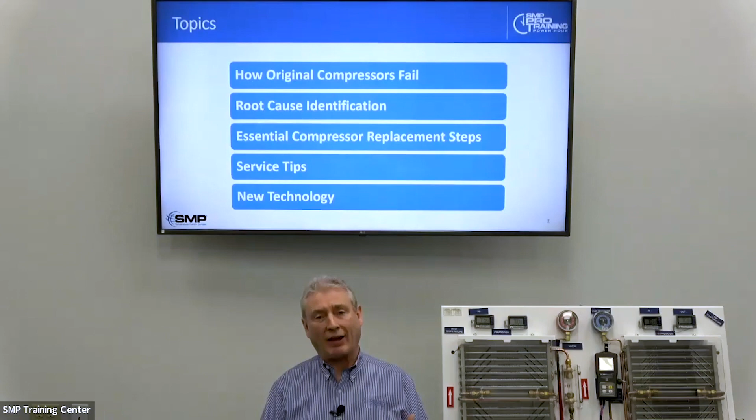Just FYI, I'm sure you know this already, but if you work on air conditioning for profit, or even to buy refrigerant in containers larger than 2 pounds, you need to be Section 609 certified. If you want to get certified, the fee currently is about... go to macsmobileairclimate.org, there's a Section 609 tab, and you can take it from there to get certified. If you work on cars and light trucks, you need to be Section 609 certified.

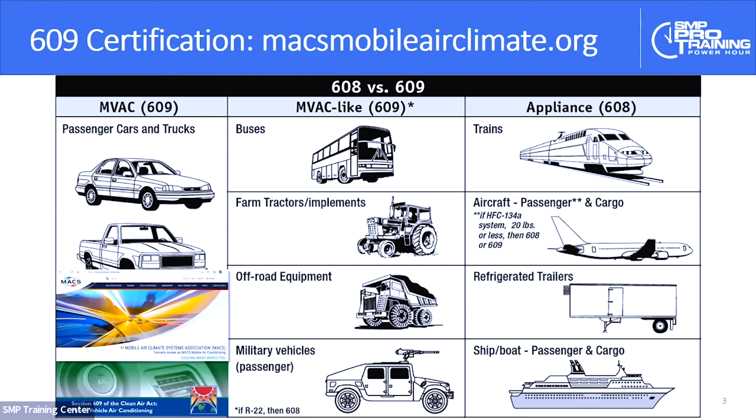If you work on planes, trains, and some of the types of equipment in the right column there, there's another certification called Section 608. That's what you would need to be certified on for those.

Not going to get too deep in the weeds here, but it is important to understand some air conditioning basic principles. If I take a tank of R134A on the left, or R1234YF on the right, and I cool that tank to 34 degrees, the static pressure in the tank of 134A would be about 29.5 psi, whereas in a tank of R1234YF, the pressure would be about 32.9, about 33 psi.

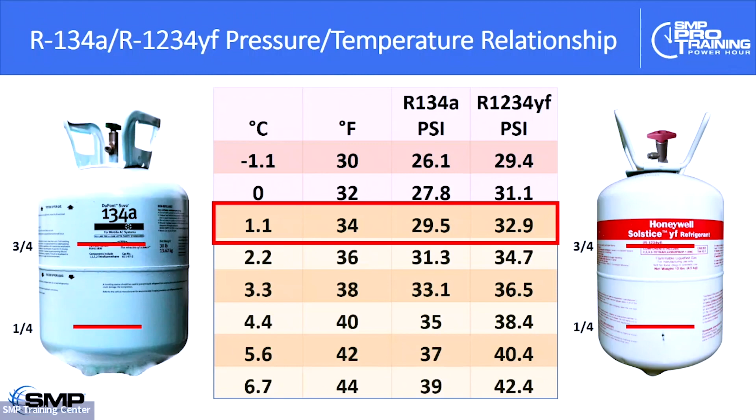The point I'm making is if I were to draw refrigerant off the top of either of those tanks, the pressure is going to drop, and the refrigerant is going to evaporate. The refrigerant will start evaporating until it reaches what we call the saturated pressure temperature - at 34 degrees, it gets back to 29.5 psi.

If I start the compressor and start drawing refrigerant out of the evaporator, reducing that pressure to somewhere between 25 and 45 psi on average, any liquid refrigerant in the evaporator will start to boil or evaporate.

Now the compressor is going to pump it into the condenser, forcing it up against the restriction of the expansion device - the TXV or the orifice tube. That's going to raise the pressure and temperature. And if I turn the fan on and blow air across the condenser, it's going to condense back to a liquid.

That liquid will be forced up against the orifice tube or the TXV. Then the compressor, either using the TXV or sizing the compressor, controls the pressure on the liquid in the evaporator so that it keeps boiling somewhere between 35 and 40 degrees, something in that range.

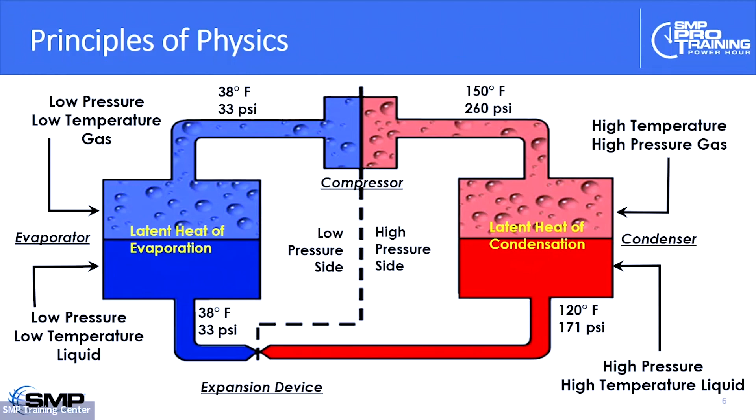If I add a little temperature to the refrigerant, the liquid is going to start getting warmer. But if I've got it in that pressure range, 25 to 45, inside the evaporator, you can see that as I add energy, that phase change is when the refrigerant is actually evaporating. As I add energy here, there is no increase in temperature - as the refrigerant is boiling or changing state or evaporating, there's no increase in temperature of the refrigerant inside the evaporator.

And ideally, this is a normally charged evaporator, orifice tube type system. You can see the refrigerant is going in at 35 on the bottom.

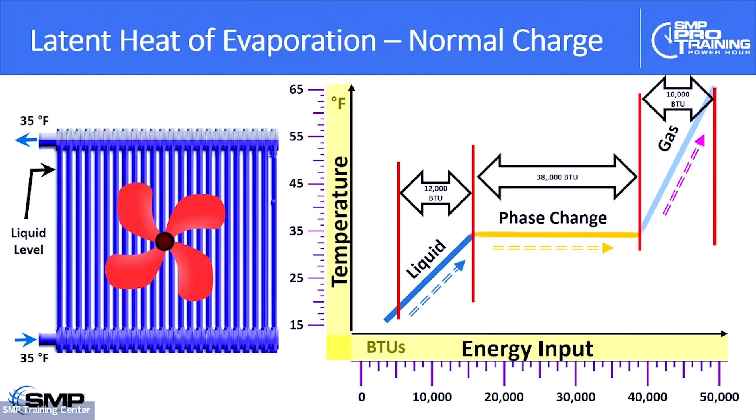It's coming out at 35, the same temperature on the top. If this evaporator was made of glass, I could see through it, and you'd see the refrigerant burbling, gurgling, boiling inside, mostly gaseous coming out the top. On an orifice tube system, there will be a little bit of liquid to carry oil up and out. The key thing to understand from the graph is that a greater amount of heat energy is absorbed as the refrigerant changes state from liquid to gas, but there's no increase in temperature. That's what you want inside the evaporator: a constant boiling state with the evaporator almost full of liquid.

Now look what happens as the vehicle ages and the customer hasn't serviced it. The liquid level in the evaporator, shown in blue, is much lower now, so all the liquid boils away much more quickly. The period of phase change is shorter, and much less energy is being absorbed during that phase change. In other words, as the refrigerant is evaporating, because there's much less liquid, there's not nearly as much heat energy being absorbed.

The key thing you may notice is that the refrigerant is still going in at about 35 degrees, but the pure gaseous refrigerant coming out the top is actually up around 50 degrees. That's important, because I've got a 15-degree increase across the evaporator. That temperature difference is a giveaway clue that all the liquid refrigerant has boiled away, and all that's coming out the top is pure gaseous refrigerant.

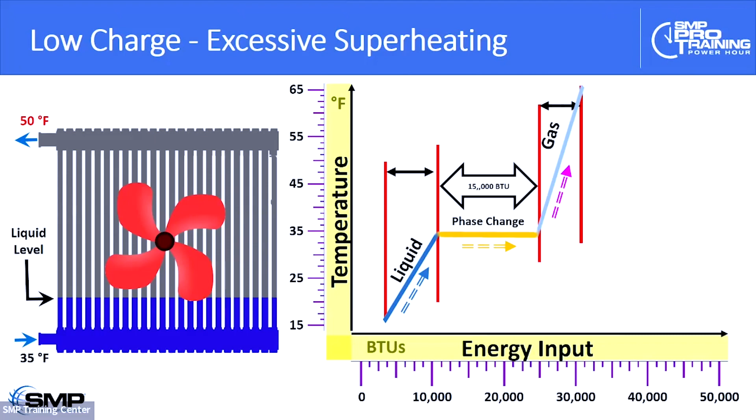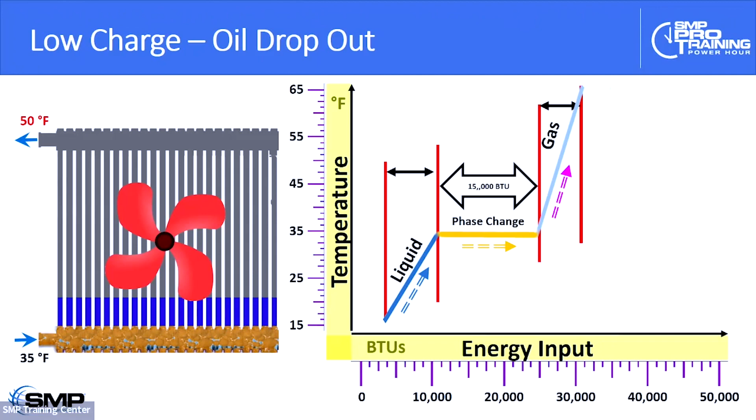This is important because oil remains more or less in the liquid state throughout the refrigerant circuit. As the liquid refrigerant boils away, the oil starts to drop out and is left behind in the evaporator. Over time, as the compressor wears and ages, all the lubricating film gets stripped off the evaporator, off the compressor pistons and cylinder walls, and then you get metal on metal. Over a long period, fine microscopic abrasive particulates can slough off the pistons and cylinder walls, and that debris gets carried throughout the system.

It's fine, microscopic debris that will fit through most of the filters and screens throughout the system, and it will be concentrated because of the oil that's been pooling in the bottom of the evaporator. That abrasive soup will be concentrated in the bottom of the evaporator. You can appreciate that this is the typical failure profile of how most original compressors fail. Typically, when the original compressor fails, you'll have a dirty abrasive soup of oil and abrasive debris in the bottom of the evaporator, and you can understand why it would be important to get that out of there.

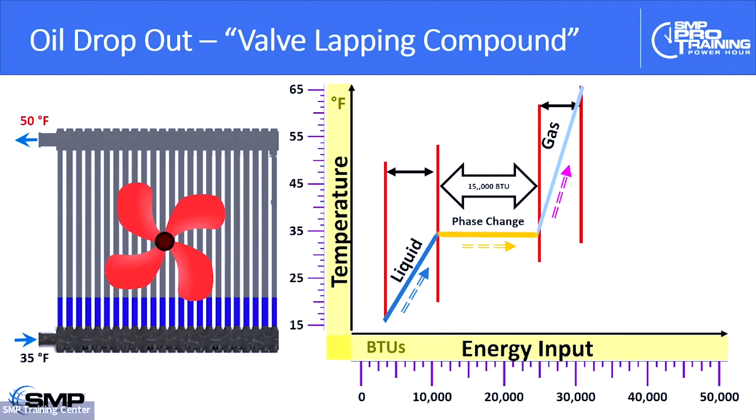Compounding the issue, if we look back to the original R12 systems with mineral oil, the molecules of oil and refrigerant had an attraction for each other. So even when the evaporator was low on liquid refrigerant, as it evaporated, because the molecules were attached to each other, the evaporating refrigerant carried oil with it up and out of the evaporator. This maintained compressor lubrication even with a low charge on an R12 system.

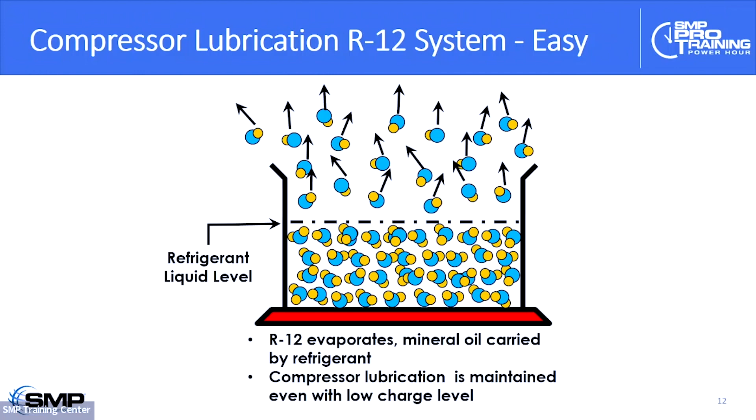However, on an R134A system, maintaining lubrication is much more difficult. That's because as the liquid level drops in the evaporator and the refrigerant evaporates, there's not nearly the same molecular attraction between the refrigerant molecule and the PAG oil molecule, so the oil gets left behind.

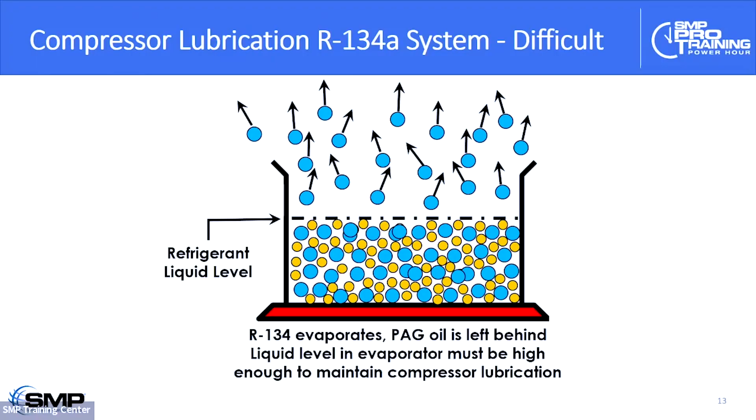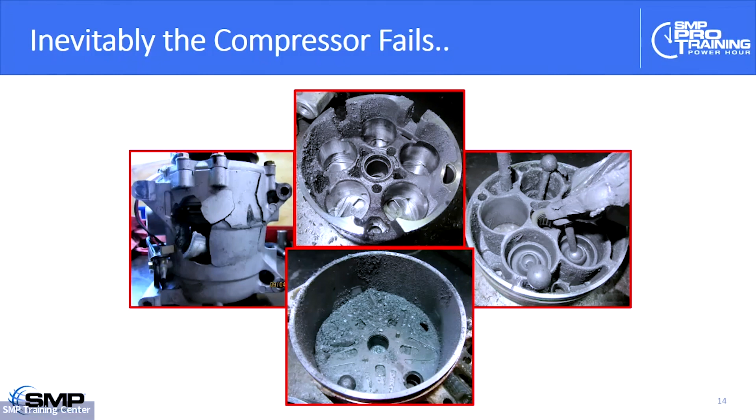And of course, inevitably, the compressor fails. This is the end result. I would say this accounts for 80% of original compressor failures. This narrative, this sequence of events, is what typically results in the original compressor failing.

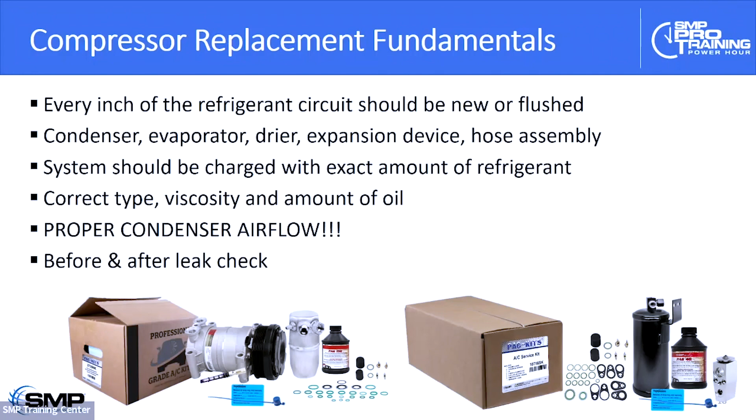The system should be charged with the exact amount of refrigerant - we'll come back to that later - the correct type, amount, and viscosity of oil, and proper condenser airflow. I'm emphasizing that because you'll be amazed at the number of air conditioning performance problems that can be traced back to a condenser airflow issue. And of course, keeping in mind that low charge means lack of lubrication, it's important that we do a thorough leak check, ideally before we do the repair, and then again after it, before we turn it back to the customer.

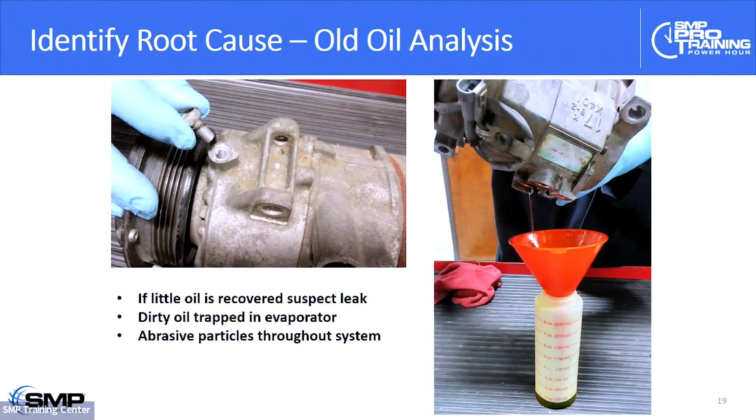So let's talk here - I've got a demonstration set up. Let's talk about how we're going to identify the root cause of the compressor failure. So I have here a compressor, and it's off of an older truck. The first thing I'm going to want to do is an old oil analysis.

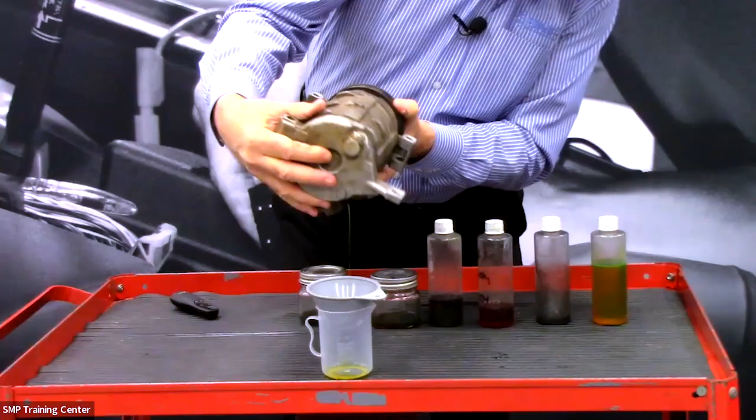I want to figure out, using the old oil, a lot about what actually caused this compressor to fail. So the first thing I'm going to do is try to drain the oil from the old compressor - there's a little bit coming out here. So you can see that I'm getting very little oil out of this compressor. And why that's important is this.

Let's suppose it was a 7 or 8 ounce system - it held 8 ounces of oil, and I only get a half ounce out of the compressor. Right there, I know that there's 6, 7 ounces of dirty oil still somewhere in the system, and that dirty oil is almost certainly in the evaporator - that valve lapping compound, if you want to call it, that's going to be dropped out on the bottom of the evaporator.

The other thing, of course, is I'm going to look at the condition of the oil. Here, for example, this was a repeat - this was actually a warranty return compressor. It turns out when we did an analysis, half this oil here is actually full of solvent - the flush solvent - the system wasn't properly flushed.

Here you can see, and if you want to get a good sense of this yourself back in the shop, take the oil bottle off the side of your recovery machine if it hasn't been drained in a while, and look at the bottom of the bottle. You'll see there's a film of microscopic abrasive particulates settled out on the bottom of the oil, and that's what's in the bottom of the evaporator. That's why it's so important to flush the system.

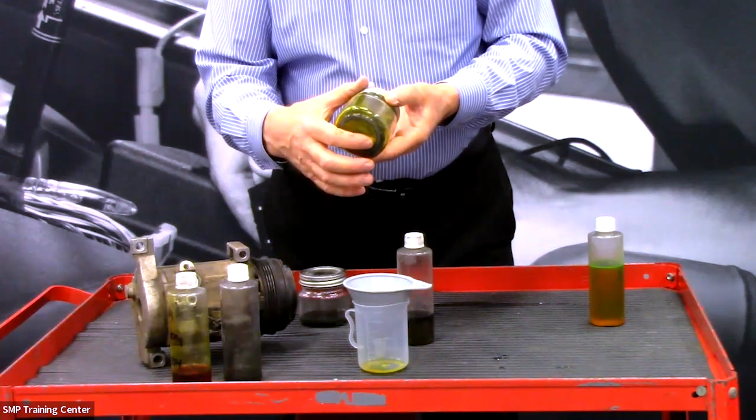Here's another couple of examples. If I look at the bottom of the glass, you can see that microscopic debris has settled out - the microscopic abrasive particulates that have settled out of the oil in the bottom of this jar here from a failed compressor.

So the other thing we want to do - let's move this display to one side here - and we're going to look at what are some of the things we need to do. What do I need to do to properly handle this? I've got a failed compressor - it's come in with the failed compressor, it's either seized or it's knocking, or I know I need to replace it for some reason or other.

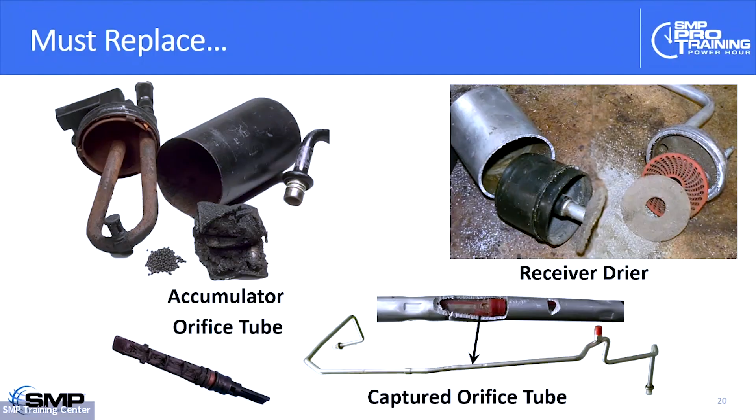So let us see what we need to do for a successful repair here. The first thing we insist on is that you replace the accumulator.

If you look inside an accumulator here, we've got one cut away. You can see it's got the desiccant material in here. If flush solvent were to contact this, the desiccant medium actually gets hot with some solvents, and it will expand. It just turns into a mess, basically. Also, when you look inside an accumulator, it's got kind of a snorkel tube coming to the top here. We call this the U-tube. You can see that if I get solvent in here, I could never get it out. You're just never going to be able to get it out. So you can't flush an accumulator. That's why it needs to be replaced.

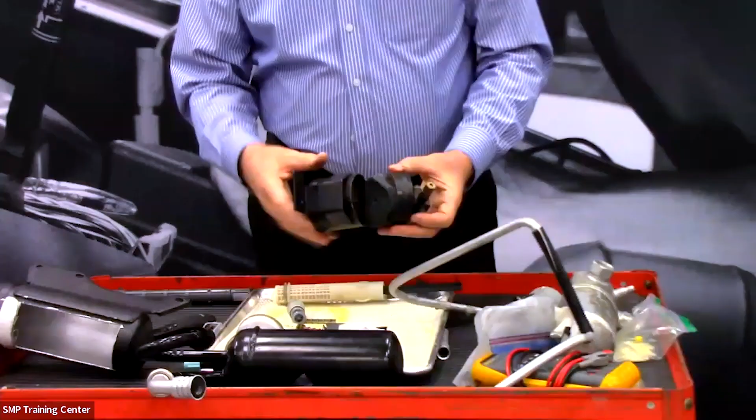For much the same reasons, here's a cutaway of an older style receiver drier. You can see it's got a filter inside. It will also have the desiccant medium inside. You've got to replace this, and you've got to replace that as well. And of course, the orifice tube.

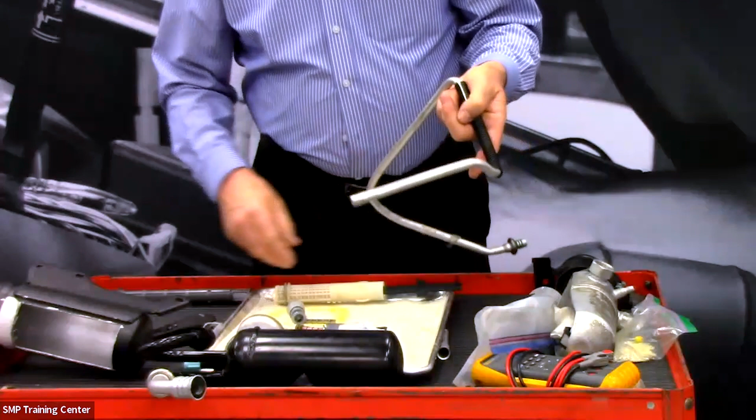Later model vehicles now are using what we call captured orifice tubes. On this one here, we've actually cut it apart, and you can see that the orifice tube is encapsulated in the liquid line. So to replace the orifice tube on this particular system, which was from a Dodge truck, I would need to replace the entire liquid line.

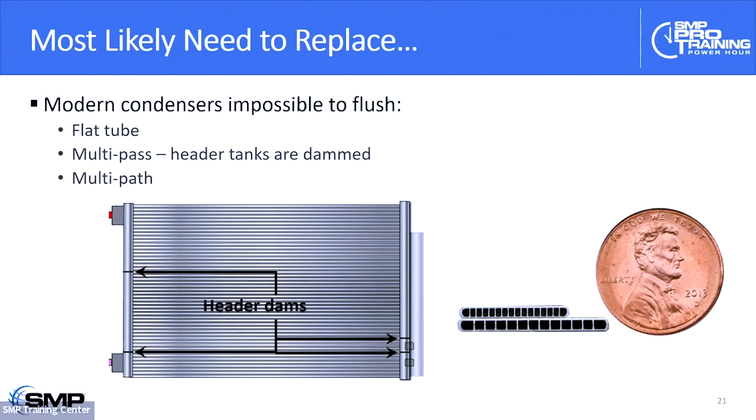Now, the other question that often comes up is, well, what about the condenser? Do I need to replace the condenser? So I've got a condenser here cut apart so we can get a sense of what's going on inside of it. And you can see how it's dammed.

All the header tanks of the condenser are dammed. And if you look inside the tubes of a condenser, they're barely bigger than the thickness of the diameter of a hair. So you've got very fine tubes. The header tanks are dammed at both ends. The refrigerant must pass back and forth three or four times before it gets out the bottom as a liquid. So it's just impossible to flush a modern condenser.

The other complicating factor here is that most TXV systems now have the receiver drier actually integral to the header tank. And of course, inside of that is the desiccant bag, and usually also some kind of filter. So to even think of flushing this, you shouldn't be thinking about flushing it anyway, but even if you did consider it, oftentimes you'd have to take the condenser out to get the desiccant medium out, get the filter out, and put the plug back in.

When you consider the cost of a new condenser versus the labor to do the flush, the pointlessness of doing a flush, and the fact that it would probably cost you more in flush and labor than to replace the condenser in the first place, it just doesn't make sense.

The other thing we often get asked about is the TXV valve. Now, we do not insist that you replace the TXV valve, but it's very important that you remove the lines at the firewall. If I take a look in here, you can see that if there's any evidence of corrosion or rust, or even a kind of matte black film of debris, you need to replace the TXV valve. If there's any evidence of contamination at the liquid inlet to the TXV, you should replace it.

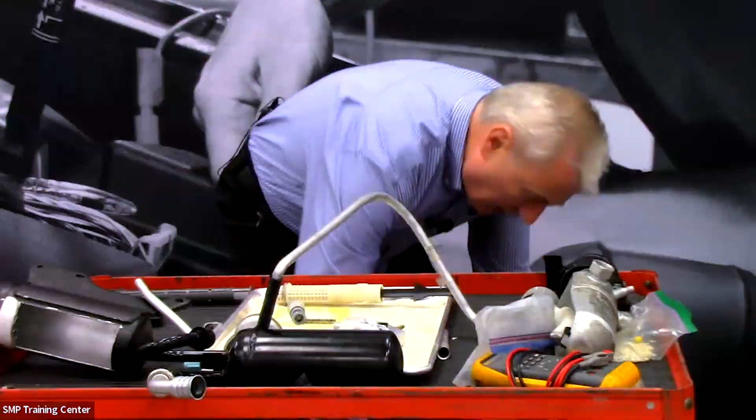And the other question that comes up from time to time is about hose assemblies. So I've got a couple here. Remember, the car's in your shop, it's probably 8, 9, 10, 12 years old. The compressor has failed. As I say, low charge is often the reason the compressor failed in the first place. And the micro leak that led to the low charge in the first place is often at a hose crimp. So if I look inside of a hose assembly here, you see the rubber—it's an organic compound that came out the side of a tree.

Oftentimes, it shrinks, hardens, crystallizes as the vehicle ages, and you end up with the micro leak that led to the low charge, oil dropout, and no lubrication—often at a hose crimp.

When you're trying to leak check, oftentimes you won't be able to, especially if the compressor is leaking, cracked or busted in some form or fashion. You may not be able to leak check this hose until you've recovered the system, flushed it, did the repair, and recharged the entire system, and you're just about to give it back to the customer. You're doing your final leak check, and now you find the leak.

So as I say, oftentimes if you do the math for the cost of the flush, the labor to do the flush, and the fact that you don't know if the hose is leaking in the first place, it just makes more sense to replace the hose assembly right from the get-go.

Now if it's a straight piece of hose, yes, you can flush it. But here you look under the hood and you see a hose assembly that looks like this. It's got a muffler or some kind of bubble in the line. If we look inside, this line is coming in here, coming up hard against the bottom of the can, and there's only a couple of pinholes in the tube inside for the refrigerant to pass through. So if you've got debris from a failed compressor in here, you just can't flush it, is the point I'm trying to make.

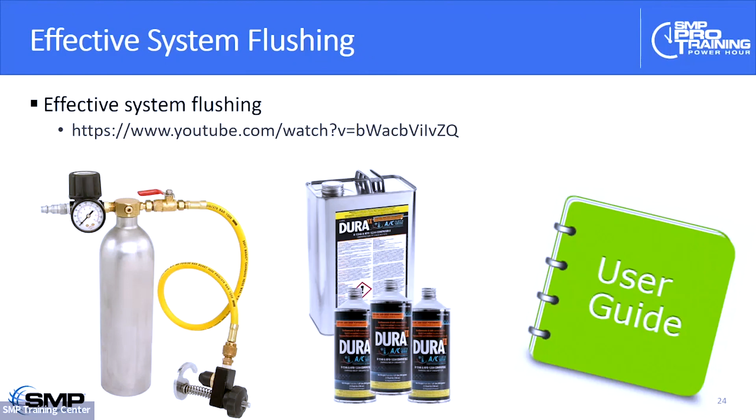Okay, so the next thing we want to talk about here is flushing. Let me get my cart in position here. Looking at the flushing situation, for an effective flush I need an effective flushing tool, an effective flushing solvent, and I really need to know how to go about doing a good flush.

The first thing I will say is oftentimes I walk into a shop and they have a flushing arrangement that looks a lot like this. It's got a tire valve here, and you static charge it with an air chuck and hold this up to the component you're trying to flush. If this is the type of arrangement you're using, I'm quite serious, you're probably better off not trying to flush at all, because the solvent gets expelled, the air expands, it runs out of momentum, and the solvent drops out inside the evaporator. What you end up with is a dirty mess of solvent, an abrasive soup of solvent and dirty oil in the bottom of the evaporator.

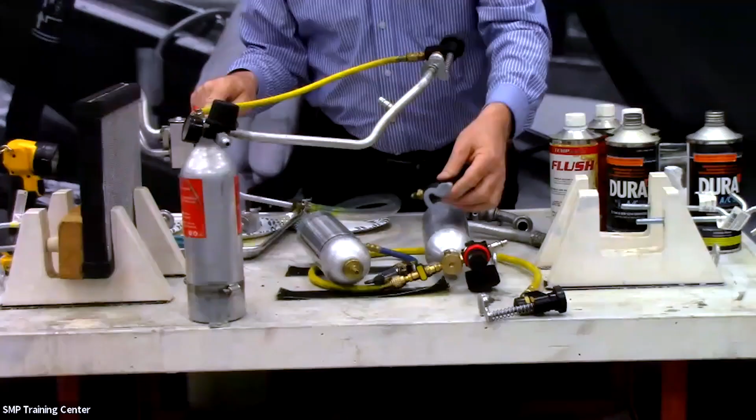So what you need is a tool similar to this here. You can see it's got a universal adapter that I can connect up to the component I'm trying to flush. It's got a pressure gauge, a control valve, and also a shut-off valve. So I would dial the pressure up to 40 PSI typically. I've got the valve closed, I connect it up to the component I'm trying to flush. Now, even if it was an evaporator with particularly dirty oil, I could give it a little squirt for a second or two, let it sit 15 or 20 minutes. And now I can come back and turn the valve on, and I just keep the air pressure going.

I connect it up to shop air, of course, to keep the momentum going through the evaporator. That prevents solvent dropout inside the evaporator. So this is a much more effective flushing tool and technique than something like this here.

The other thing, of course, is most modern vehicles now are using thermal expansion valves. And a challenge with a thermal expansion valve, as you can pretty much see here, is the valve is usually right in the firewall, halfway in, halfway out. It can be difficult to attach your flush tool to it.

So what you can do there is actually quite easy. It's very easy to adapt an old style TXV valve. You can unscrew the power valve, and in fact, I can unscrew the superheat. By the way, these things are not adjustable, they're set in the lab at the factory, so you don't want to be trying to do this in the field.

But now I've taken the thing apart, and I just take a 1/2-inch drill bit. I drill out the liquid line, the liquid port on the valve at a bit of an angle, and you end up with something like this here. So now I've got a simple, inexpensive flush adapter that I can attach to the evaporator.

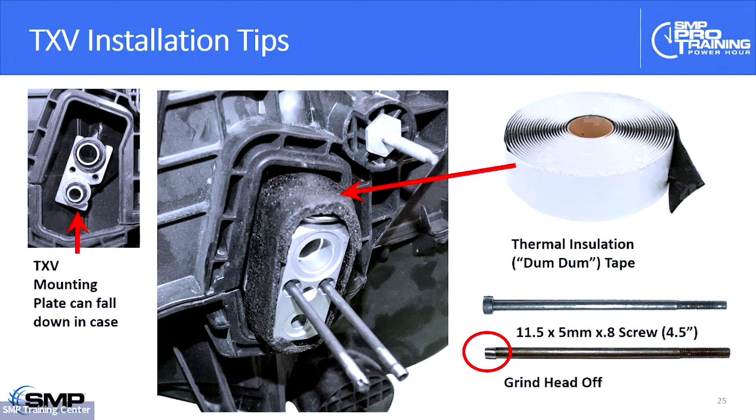The next thing I want to talk about is replacing the thermal expansion valve. Remember, if you're replacing the thermal expansion valve, you'll want to put some dum-dum tape, a thermal insulation tape, on the power valve. That power valve should only be exposed to refrigerant temperature, refrigerant coming out of the evaporator, not underhood temperature. So it's very important that you put some thermal insulation tape on the expansion valve as you're replacing it.

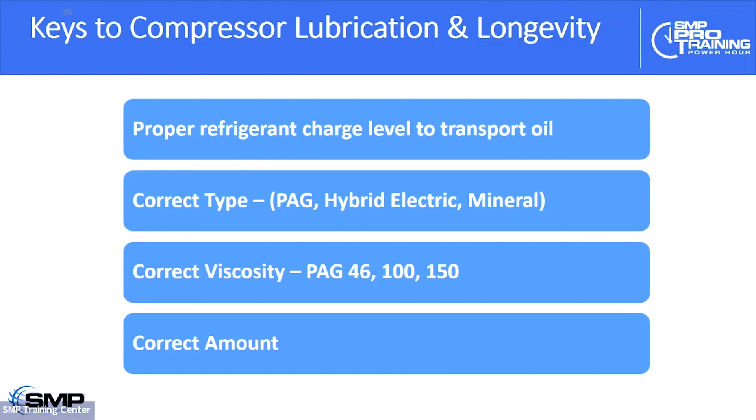Next piece of the conversation here, we're going to talk about compressor longevity and compressor lubrication. Of course, it's very important when you're working on it that you've got the proper refrigerant charge level - I'll come back to that in a couple minutes. You also need the correct type of oil, whether PAG or hybrid electric or mineral, the correct viscosity of oil, and of course the correct amount of oil.

So while we're talking about oil, if you drive a nice vehicle, you probably pay a lot of attention to the type of engine oil you use, and you probably change it every 3, 4, 5, 6, 7,000 miles depending on the recommended interval. A lot of science, as you probably already know, goes into oil development and oil additives and so on.

Well, the oil that we use in a compressor, you're expecting it to last the life of the vehicle. Oils have all kinds of additive packages to improve various features. They're end capped so they encapsulate and keep moisture in suspension in the system so it doesn't cause corrosion. We'll have antioxidant additives, ashless anti-wear so you don't get a soot buildup as the oil is heat cycled in the system, metal passivators, and anti-foaming agents.

If you walk out to a vehicle on a hot summer day and start the engine, turn on the air conditioning, the pressure in the crankcase of the compressor drops dramatically, and a poor quality oil will actually foam up inside the crankcase, and the system just simply won't work properly. So there's a lot of science that goes into the development of air conditioning compressor oils, and there's no such thing as a universal oil - you really need to be using a quality oil when choosing.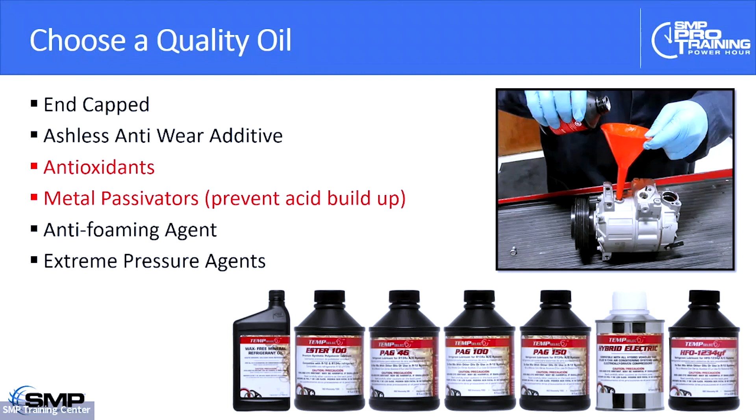So the next piece of the puzzle here is we're going to talk about condenser airflow.

And for that, I've got another prop ready to go here.

As you can see in this little experiment, we're putting a piece of cardboard in front, sliding it down behind the condenser, but in front of the radiator.

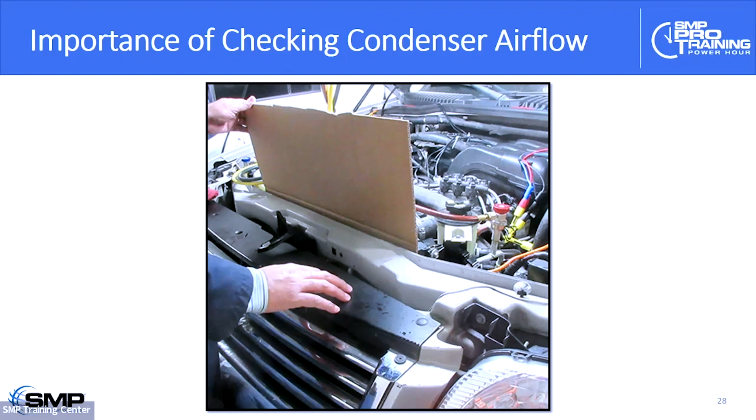The point of this demonstration is that airflow, condenser airflow, can have a dramatic impact, a really dramatic impact, on AC performance.

If you look at the black line, which is engine coolant temperature, you see that the coolant temperature actually dropped a tiny amount when we blocked the airflow. That's because the hot air from the condenser is no longer coursing across the radiator.

So the real takeaway here is, if you're looking at engine coolant temperature as a possible clue or indicator that you have an airflow problem, 9 times out of 10 you're going to come up empty-handed. In other words, an airflow issue will affect air conditioning performance much more quickly than it will affect engine coolant.

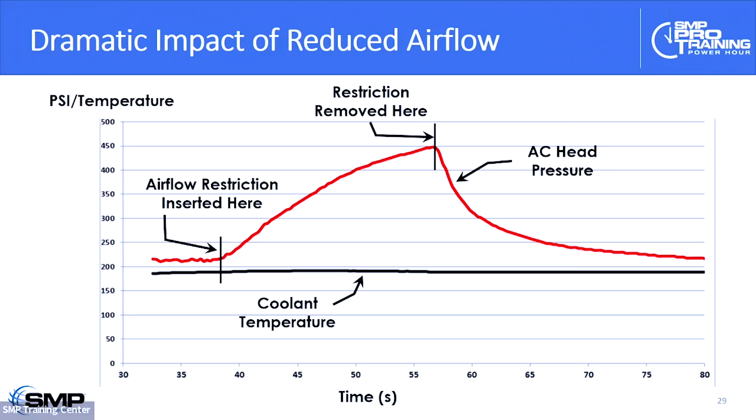So I often see, and this is a pretty extreme demonstration, shrouds missing, the little draft excluder between the back of the condenser and the front of the radiator. Anything damaged, broken, or missing with the shrouds, anything that would affect airflow across the condenser, will have a dramatic impact on air conditioning performance.

Now, what I'm looking at here, this is a vehicle. The compressor and the air conditioning components are related to a 2003 and later Dodge Ram pickup, the Cummins pickup.

And what happens on these, we've seen them where we get a lot of tech line calls here. The compressor's been replaced 2, 3, 4 times, and it keeps having repeated compressor failure, and the air conditioning never works really well. The root cause of the deal usually is this electroviscous fan clutch.

It's computer controlled, the speed is computer controlled on this electroviscous fan clutch. The viscous fan clutch fails. It may set a trouble code, but it won't turn on the check engine light, and around we go.

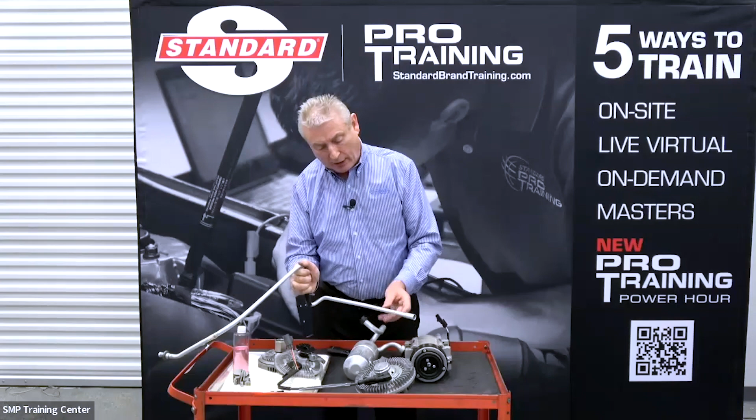The other issue, of course, this truck also uses what we discussed earlier, a captured orifice tube in the liquid line. So if you're not aware of that, people keep replacing the compressor, not understanding that in conjunction with that repair and doing the proper flush, I need to diagnose and confirm there is no problem with the electroviscous fan clutch. Also, as part of that repair, I need to replace the liquid line with the enclosed orifice tube.

So next up here, we're going to talk about recovery, recharging, and recycling. And for that, I'm going to pull in my final demonstration. So here we have, this first slide here, I've actually got the component on the cart here.

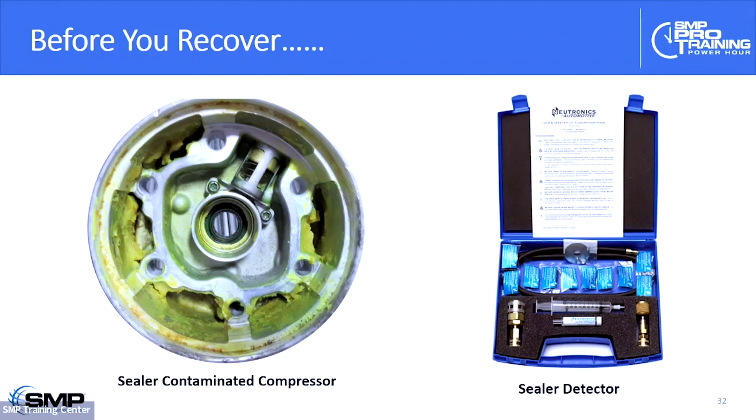You can see this is, somebody has obviously used sealer in this system. And the point I'm making is before you're about to repair a vehicle, probably the first piece of equipment you're going to connect up is your recovery recycling machine to recover the refrigerant.

Well, I'm cautioning before you do that, understand that a lot of folks use sealer, you don't know, right? So you want to be aware, if you draw this sealer into either your refrigerant identifier or your recovery machine, it's going to be a pretty expensive repair bill.

So there is a tool out there. This is called a... sorry, I take that back, this is a sealant identifier, not going to get into all the details here, but it's got a little flow meter in here. It comes with a graduated leak.

The whole idea is if the flow drops, you connect it up to the high side of the system. Static, if the flow drops, it tells you that the sealer is acting on the restriction, and you've most likely got sealer in the system.

This is a tool for detecting sealer in the system. This is pretty important, folks. You know that refrigerant has gotten very expensive, so people are taking all kinds of shortcuts. Drawing sealer into your machine can be a pretty expensive day.

The next thing, once I sample and check for sealer, I want to use a refrigerant identifier. Here's the latest model we're looking at. The reason for this is refrigerant is expensive. 134A, I think, has tripled in price over the past couple of years. YF is $500, $600, $700 for a 10-pound tank. People are using all kinds of rogue refrigerants in systems. So before you draw that in and contaminate your tank of 134A or YF, it's a good idea to use a refrigerant identifier to confirm you don't have rogue refrigerant in the system.

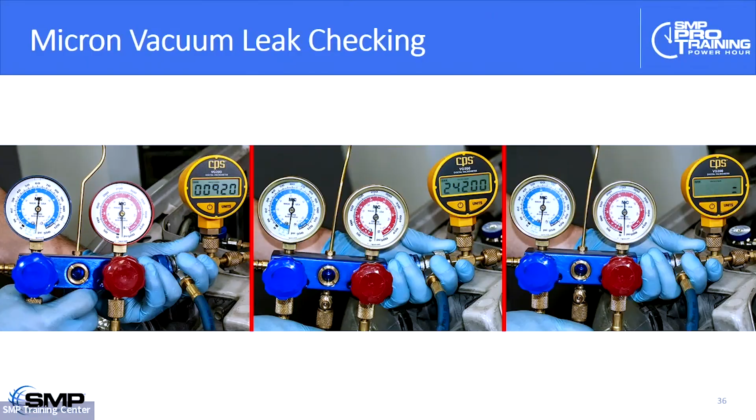My point is, rather than putting the whole system back together and finding a leak later, if I use a micron vacuum gauge while evacuating the system, and I turn the vacuum pump off for a few minutes and see that micron vacuum bleeding up, that's a dead giveaway I've got a leak in the system. I'll use nitrogen, or maybe a hydrogen-nitrogen forming gas mix, to find that leak before going through all the trouble of evacuating, recharging, and leak checking the system later. I can save myself a bunch of time by using a micron vacuum gauge in conjunction with my manifold gauge set or recovery machine to monitor vacuum during evacuation and see if I have a slow leak.

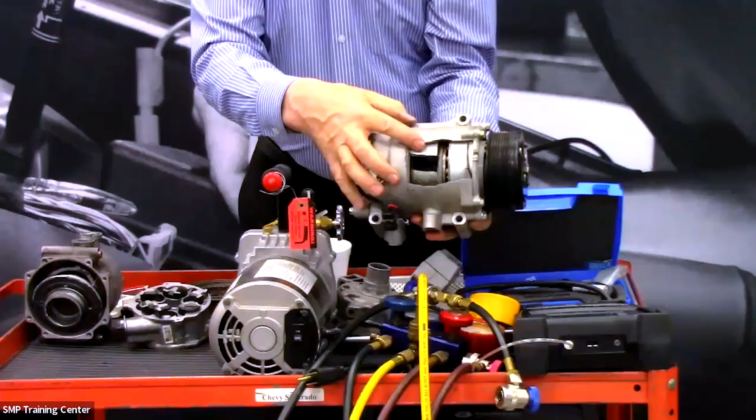We talked a little bit about charge level. If you overcharge an air conditioning system, you can potentially end up with this. If you slug a compressor, here's a classic example. You can't compress a liquid. If you overcharge a system, you get slugging, liquid locking, and now you've damaged the compressor.

On the other hand, we explained how the oil drops out. Here's a classic example of a compressor that is bone dry, obviously with no lubrication, most likely because the low charge caused oil to drop out, resulting in no lubrication. Here's another example of slugging, this one from an ECV, an electronically controlled compressor.

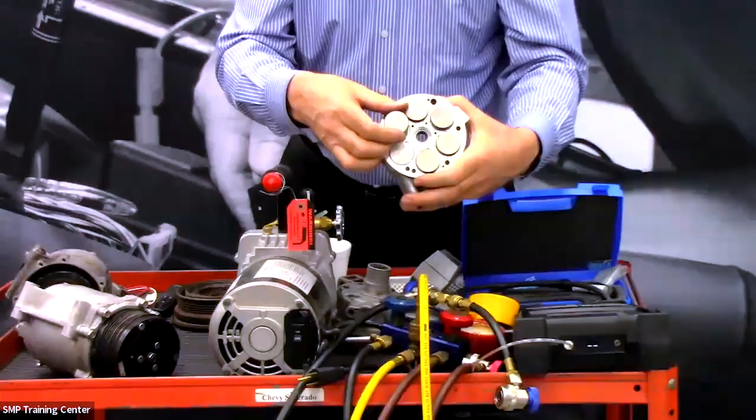And you can see here that the piston has broken. See the liquid lock, the piston is broken. So that's a little bit about charging. Overcharge leads to slugging and liquid lock, which breaks the piston. Undercharged leads to oil dropout and lack of lubrication. That's the point I want to make here.

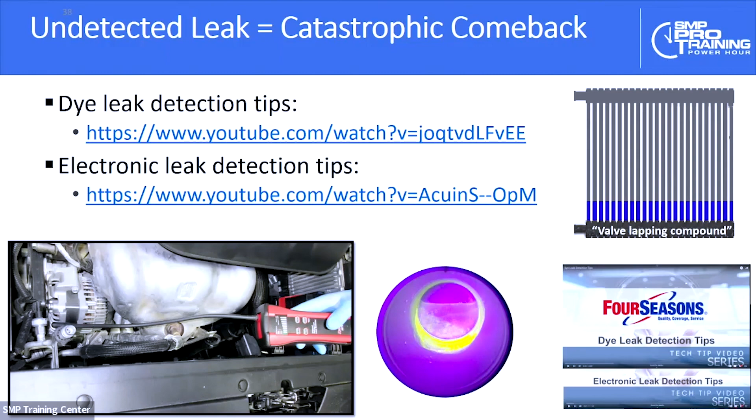So let's get ready to wrap it up here.

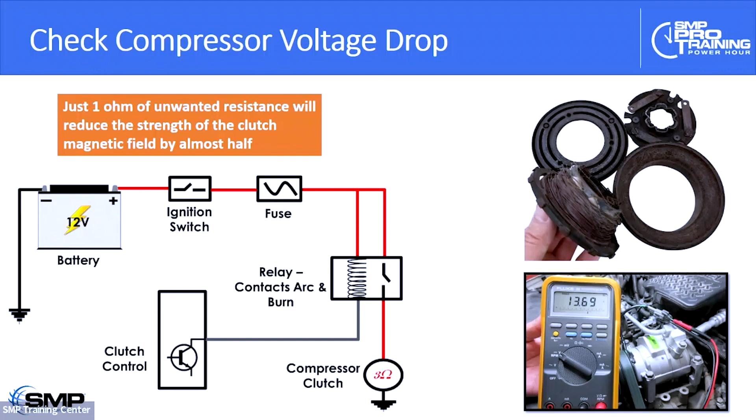You've heard this before about checking voltage at the clutch. The point I want to make here, here's an obviously severely burned clutch. Every time you do this repair, you need to check for voltage at the clutch. It needs to be within about 1 volt of system voltage. To encapsulate it in one sentence, 1 ohm of unwanted resistance in the clutch circuit will reduce the strength of the magnetic field holding the clutch together by almost half. That's the importance of doing a good voltage drop check under load at the AC clutch before you run the vehicle back to the customer.

So we're going to wrap up this conversation with some talk about electronically controlled variable displacement compressors. And I've got one final display card here to talk about that. Get in position, and we'll be with you now in one moment.

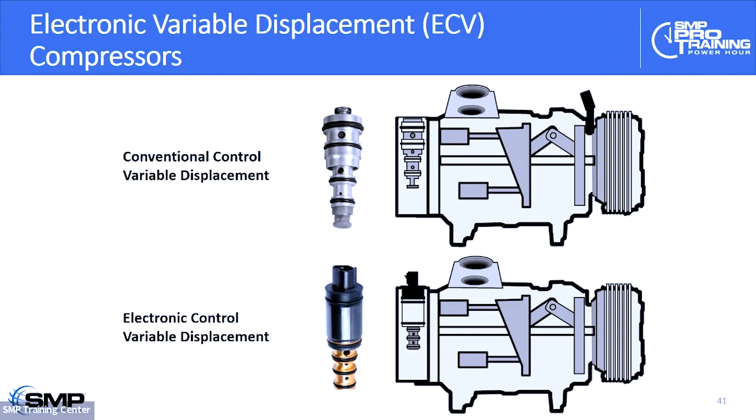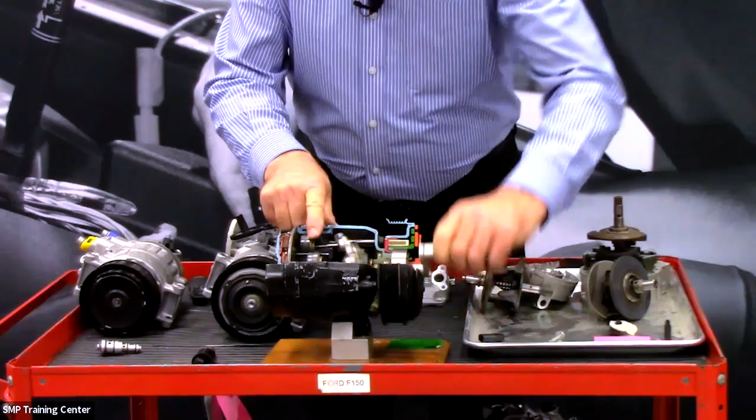So you may have noticed that a lot of later model vehicles now are coming with what we call electronically controlled variable displacement compressors. Here's an old school GM V5 compressor. You can see when I turn it, the pistons are traveling back and forth quite a ways. This has got an adjustable wobble plate or swash plate in there. If I change the angle of that swash plate, now look at the pistons. They're traveling back hardly anything at all.

So in this old school compressor, there was a pneumatic valve. You can actually see a cutaway here in the back of the compressor. It monitored low side system pressure, basically evaporator pressure, which is a function of heat load. If I bleed pressure in and out of the crankcase, I can control the stroke of the compressor here. So that's a pneumatic valve.

If I throw away that pneumatic valve and replace it with a computer controlled solenoid, we call these ECVs, or electronically controlled variable displacement compressors. Now the computer can look at high side pressure, ambient temperature, road speed, a myriad of different inputs, to fine-tune the pumping displacement of the compressor. For example, the econ button in the dash prioritizes fuel economy over creature comfort, and that will actually affect the command the computer sends to the solenoid.

I'm emphasizing this because there are two iterations of this compressor. Most of the early ones were clutchless. Do you see here that when I turn the pulley, the shaft is always turning? We see these misdiagnosed quite a bit because the technician puts his gauges on there. The high side pressure is abnormally low, the low side pressure is abnormally high, and they think it's a bad compressor. What we need to check, to be sure before condemning this compressor, is whether the solenoid in the rear head is getting a command from the control unit.

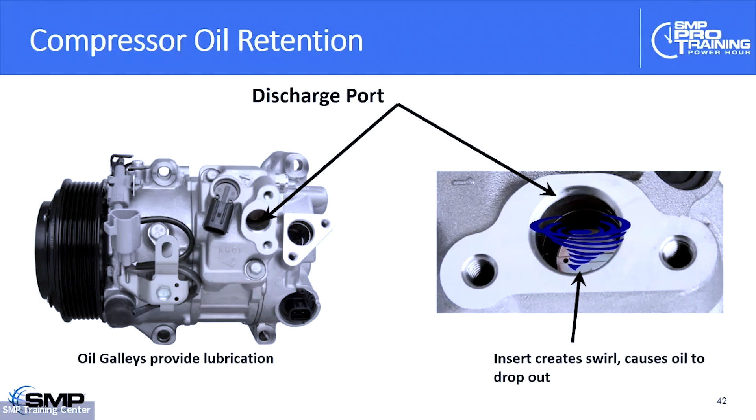The other important thing to understand about these compressors is that most modern compressors now have what we call oil retention. There's usually a swirl valve in the discharge port here that thrusts the oil out against the outside walls of the discharge port.

The oil drains back inside the compressor, so a lot more of the oil is retained within the compressor. A challenge in the service world is if all your oil is retained within the compressor and you add oil or dye on the suction side, it can make dye leak checking much more difficult on oil retention type compressors. So something to keep in mind if you're dealing with a later model vehicle that has oil in the compressor.

The other thing I want to point out is that most modern compressors now have a crankcase. If it's a variable displacement compressor, it's going to have a crankcase, and you can see it's got a drain plug here, and right here. So if I'm draining this compressor or adding oil to it, I need to be sure to remove the oil through the drain plug. Where if it's an old school axial GM design compressor like this here, it does not have a crankcase, so I would be adding or draining oil from the suction port on the compressor.

So that just about wraps it up for today. Got some refrigerant news for you before we go. The transition to R1234YF is just about complete.

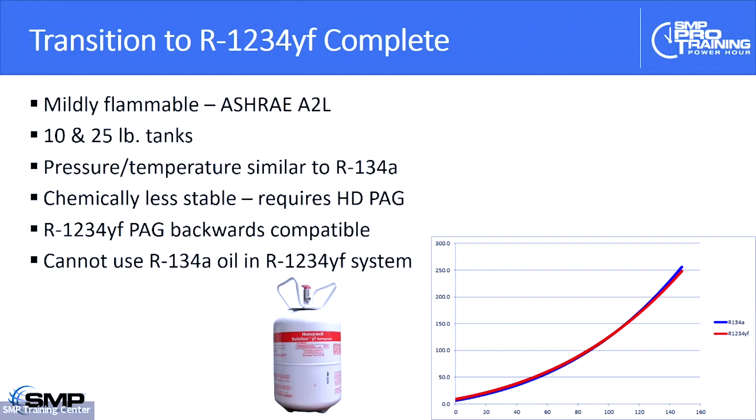The real differences you have to watch out for is the oil. The YF systems require an oil that's still a PAG oil, but it has a heavy-duty additive package to reduce the buildup of acid in the system. Also, the evaporator, I've got one here, is built to a higher standard. The YF evaporator has to have a yellow decal, like you can see here, that says it meets SAE J2842 for the flammability concern. And the other piece of the puzzle is most of these YF systems have that internal heat exchanger that I may have to consider replacing in conjunction with my compressor replacement.

I do want to emphasize, I'm hearing a lot of anecdotal reports on this: remember, R134A takes 13 years to break down in the atmosphere, while YF breaks down in 11 days. So the consequence of that is if you don't do a good evacuation and there's trace moisture in the system, you can get very rapid acid buildup in a YF system if you don't follow good hygiene when doing a compressor replacement. So you're going to need all new equipment.

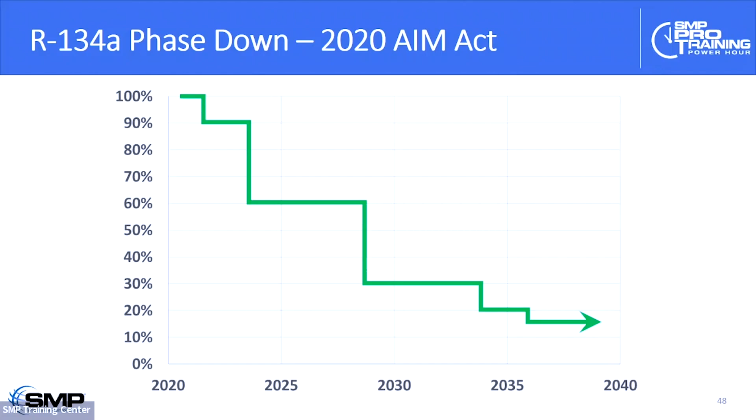Don't forget, that's just part of the AIM Act from back in 2020, kind of during the pandemic. R134A is being phased out. Already, I think starting October, R134A production levels have been cut back by 10% of 2013 production levels, and over the next 15 years the plan is to phase it out pretty much all the way. By year 2036, they want production of 134A to be only 15% of 2013 levels. So just understand that's probably going to mean R134A is going to become more difficult to find, and its price is probably going to increase.